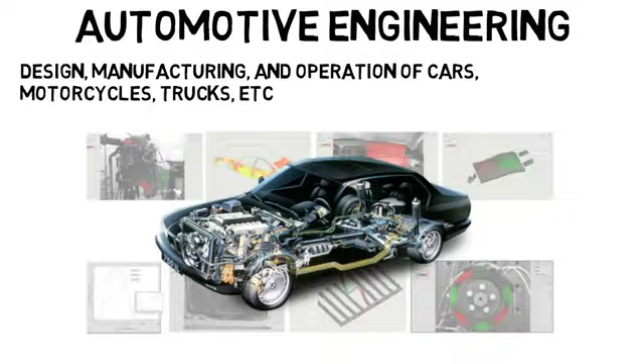Automotive engineering is about the design, manufacturing, and operation of cars, motorcycles, trucks, and other automobiles. There are a lot of subdisciplines within automotive engineering, and there are many things you can work on when it comes to an automobile. For example, you could work on the safety aspect, assessing various crash scenarios, whether it be on the computer or doing actual crash testing.

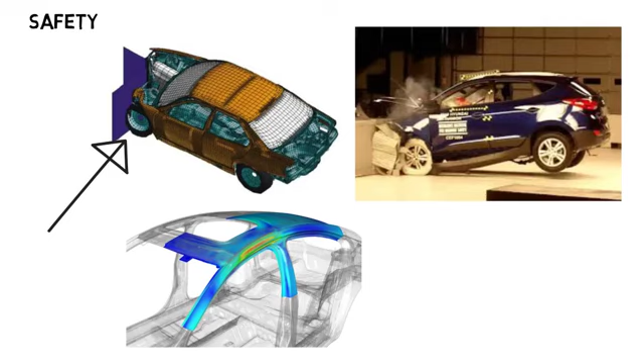Cars need to meet certain standards to protect the driver and passengers. The frame of the car has to be designed properly so that energy from a crash is absorbed or moved away from the driver. Like I said in a previous video, cars are meant to crumple in an accident, as engineers design them that way to save the lives of the people inside. If the car was extremely strong and no damage was done to it, all that energy would be transferred to the people inside.

There's performance, analyzing how fast the car can accelerate, how quickly it can come to a complete stop, which of course is important, and more. There's vehicle dynamics, looking at things like braking, handling, and steering, and how the vehicle will respond. The engineer who works on this would have to analyze or design the braking, the tires and wheels, suspension, they could work on the frame as well, and more.

There's fuel economy, where you look at fuel efficiency in miles per gallon and test car emissions such as hydrocarbons, carbon monoxide, carbon dioxide, and so on. But of course this wouldn't be the case for electric vehicles. There's shift quality, where you focus more on the transmission, the durability of the car, electronics, and much more. Overall, just note that there are many components to a vehicle.

Common jobs would be like designing on the computer, testing, and actually working with a physical vehicle, or even manufacturing, where you help with the making of the vehicle and its components.

Now when it comes to college, automotive engineering is rarely offered as a major, at least for undergrad. The most common major to go into is mechanical engineering, and then you would pursue careers in the automotive industry, or you'd get your master's and even PhD in automotive engineering. But that's not the only option if you want to work on cars.

I said before that materials engineers can work on cars, electrical engineers can work on cars, especially with electric cars becoming a thing. Computer scientists are even needed for self-driving cars, to write the programs for the autopilot as an example. And there's even mechatronics, which may be its own major depending on your school, or it's just a subfield of mechanical engineering, but this can lead you to working on the car control systems and similar aspects. And these are just to name a few.

So you can work on cars through various majors, but mechanical is just the most common one people think of, and it also depends on which aspect of the vehicle you want to work on.

Now a huge area of research you probably all know of is self-driving cars. Companies like Tesla, Uber, Google, Toyota, Ford, General Motors, and more are all aiming to get self-driving cars out on the road. Now we do have self-driving cars right now, but there are restrictions to them, and at the moment we are still waiting for a fully autonomous vehicle that's available to consumers.

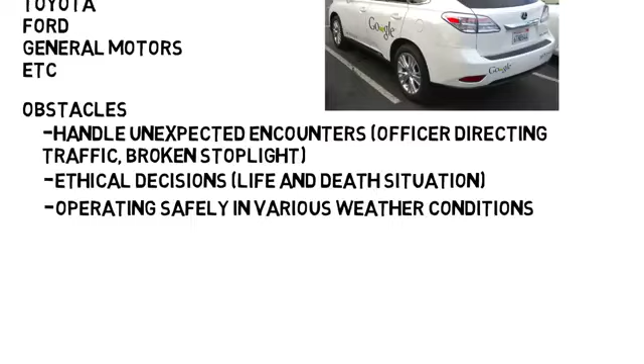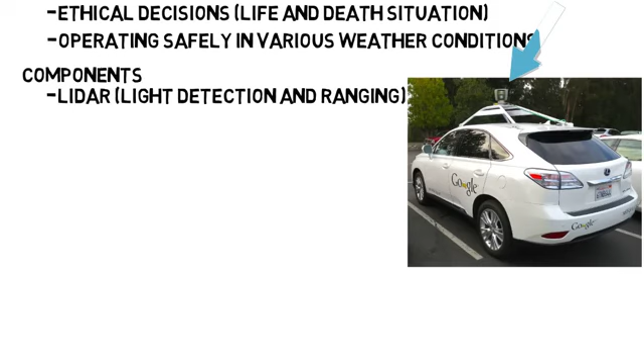Just to name a few, there's LiDAR, or light detection and ranging, which basically uses light to detect surroundings, and is what you see on the top of the Google car here as an example. There's GPS, which the car uses to navigate to its destination and so that it knows where you are. There's the radar system, which is also used to map out the surroundings, but using lower frequency waves than light, or what the LiDAR uses.

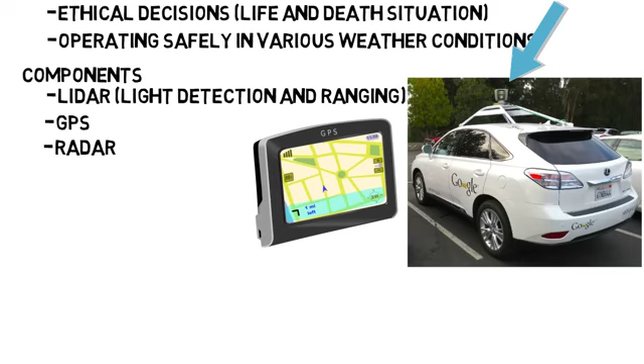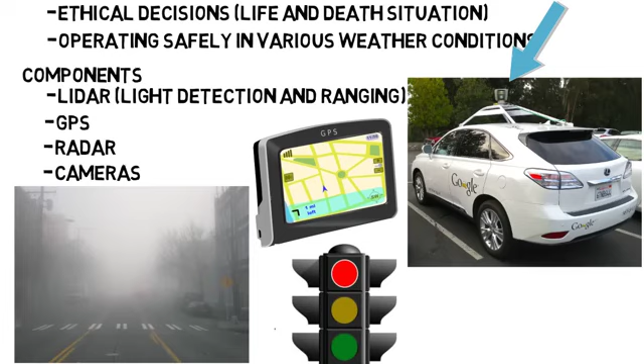And this has its advantages. As one example, LiDAR will not work well with heavy fog, whereas radar will. And then there's cameras, which read the road and the surroundings as well, but they can also read traffic lights. Research is going into putting these together with even more components to make a safe self-driving car. But even though self-driving cars seem to be the main thing happening, other aspects of cars are also trying to be optimized.

Take the new Audi A8 suspension. This new suspension system incorporates an electric motor for each individual wheel. There's a camera on the front that reads the road and detects bumps so that the air suspension can coincide with those bumps, and with those precise reactions, you can nearly eliminate vibrations. Working with the camera and transmission of data could be worked on by an electrical or maybe computer engineer, but the suspension system itself and doing tests on vibration would be something a mechanical engineer would do.

There's research going on materials that aim to make lighter but safer cars, and this may involve looking at different types of metals that have different properties like varying strength and density. A lot of the metals in cars today did not exist just 15 years ago, and we are still continuing to make advancements in this area.

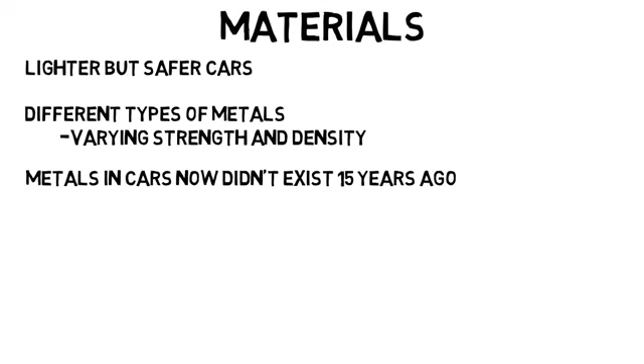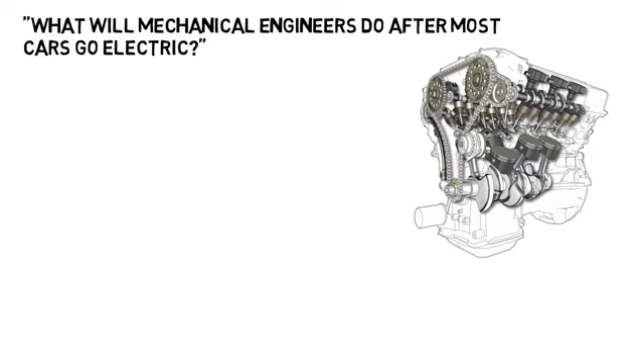Now, just to show again how much there is to work on, I found a Forbes article that I linked below titled, "What Will Mechanical Engineers Do After Most Cars Go Electric?" Which is a fair question because electric cars don't have an internal combustion engine, and so are the mechanical engineers needed? Well, of course they are.

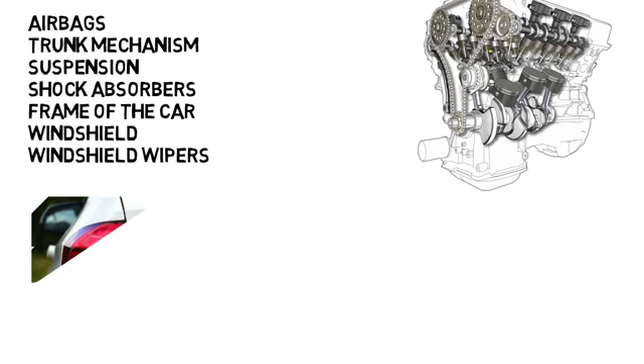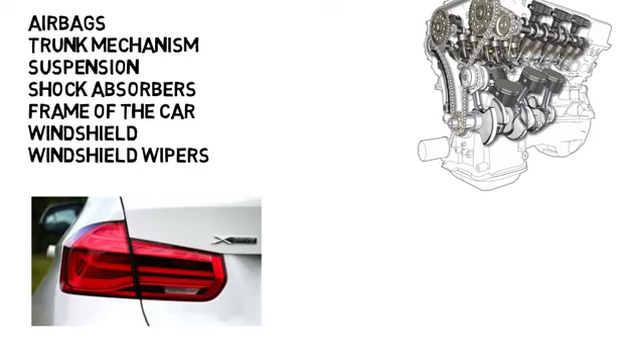Even though mechanical engineers do work on engines, most of them work on other stuff. Think about what a car really has: the airbag, the trunk mechanism, the suspension, shock absorbers, the frame of the car, the windshield, and even the windshield wipers. Everything that a car has, someone, and usually multiple people, have to work on, design, test, and manufacture. The article even really shows you the detail when they say how even the plastic taillight cover had to be made accurately and economically so that it could fit the car. And another engineer even had to design the machine that makes that taillight. There's so much more detail than you may think about all the things that we use. So yes, mechanical engineers are of course still needed.

Now when it comes to companies you want to work at, you may think of some of the typical ones like Honda, Toyota, Ford, Tesla, and so on. But there are also suppliers for these companies, and I saw multiple articles state that you might even do more of the cool design work at those places that you probably haven't heard of. For example, take Honda. Huge company that I'm sure everyone watching knows of. But do you think every single part of a Honda is made by them at their plants? Because they actually are not. Many other companies help with certain parts, and I'm sure most people haven't heard of the majority of these companies.

According to Investopedia, AGC Automotive supplies Honda's windshields, Takata supplies their airbags, Borg-Warner supplies the automatic transmission systems, Automatic Spring Products supplies the seat components, and there are more. So even if you don't land the job at Honda or Toyota, just realize how many more companies there are that you can work at.

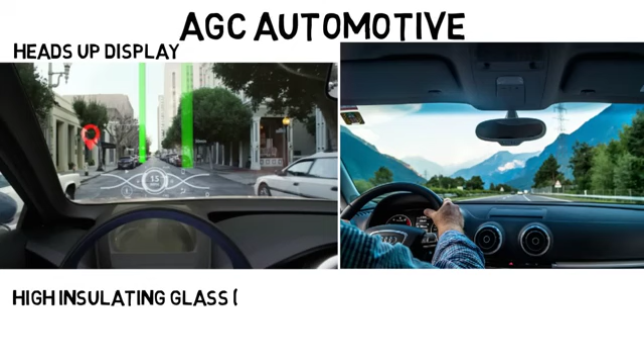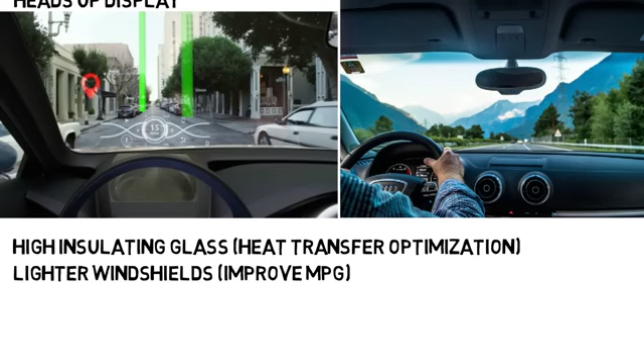Now something like windshields may not sound very exciting, but if you go to AGC Automotive's website, the company that supplies Honda's windshields, and look at their products, you'll see a lot of things. Things like heads-up displays on windshields, which basically display dashboard information on the windshield so drivers can stay focused on the road. There's high insulating glass for heat transfer optimization to maximize comfort. They're trying to make lighter windshields to help improve the car's MPG by reducing weight. And they're even working on glass where with the press of a button, you can control how much light and heat comes in, which helps reduce the need for AC.

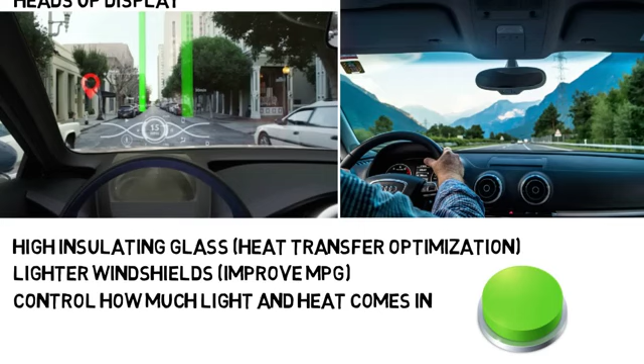So when people say they want to work on cars, just realize there's way more to it than you may think. You may help design the overall concept of a new vehicle, but you might help design the windshields, the suspension, the frame of the car, and various other specific aspects of these vehicles.

In college, you want to make sure you also get involved in automotive projects. Look into joining the Society of Automotive Engineers, or SAE, which your school might offer. Then you'll be updated on competitions you can participate in. Look up the Formula SAE, which is a student competition amongst college students where they aim to design a formula-style race car based on certain rules, such as which engine you might have to use. Then you're scored by a variety of factors like cost of manufacturing, acceleration, fuel economy, endurance, etc. There's also an electric vehicle competition done by this organization. You'll work with a team, get hands-on experience, and you have a great thing to put on your resume.